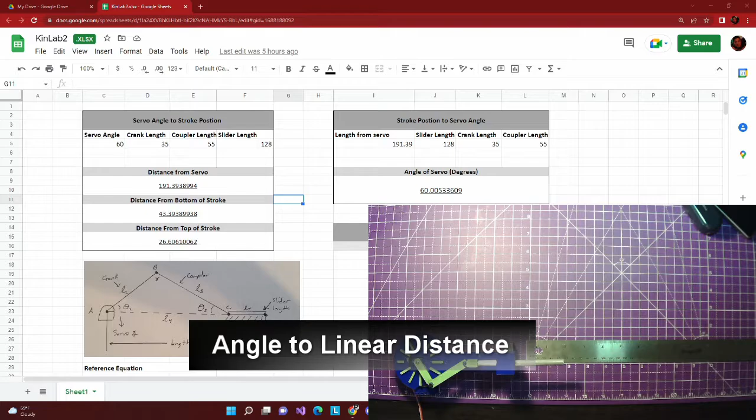Hi, this is Austin. This is lab number 2 for kinematics, rotary to linear calculations. We're going to calculate from servo angle to stroke linear length, and in reverse, from stroke linear length to angle.

So we've got our spreadsheet over here. We should just be able to enter the angle and it will calculate the distance from the servo, which is L4, this little dotted line, and the distance from the bottom of the stroke. It's kind of hard to see on this one.

Let's pull this up. So distance to the bottom of the stroke is from this little black mark over here when it's in the retracted state, and distance from top of stroke is from the retracted state end, this little dash line, to the extended end of the rod over here, this black arrow.

First things first, we'll go briefly over the calculations. This is the reference equations we use, and we input these equations into Google Sheets, and that's how we're able to pop out these values over here.

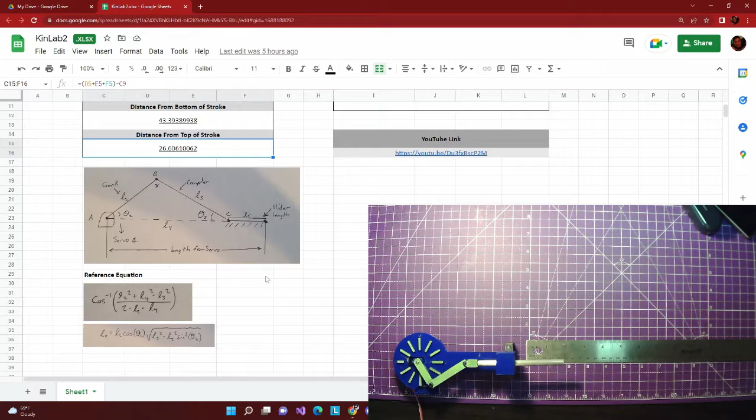And there's L4 right there. Okay, so a weird thing with this setup is that there's a little offset distance, this orange box over here, and at the end of the orange box is our technical zero point. So the offset distance is from the blue end of the blue part, as you can see in the picture, to the end of the rod when the rod is at 180 degrees. That distance is this orange block, which is 16.50.

So we'll reset it right now to 180 degrees so you can see the offset distance.

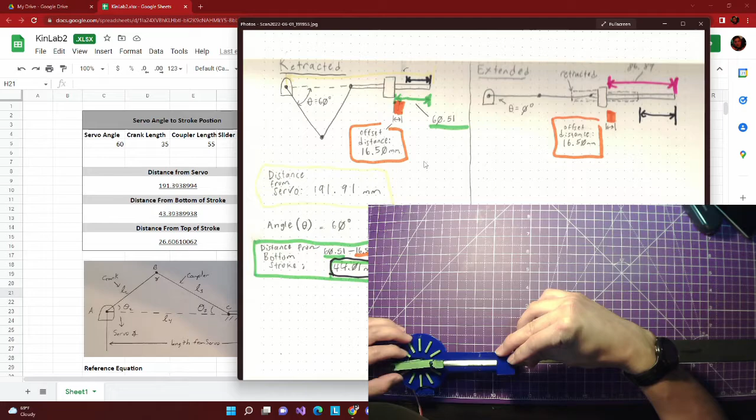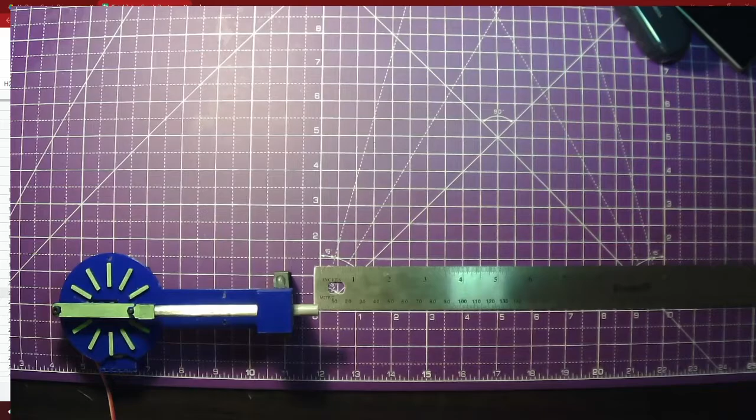It's a little hard to see, let me increase the resolution here. So as you can see, this is at the 180 degree position, and the end of the rod is at this zero mark over here. Be careful though, these grid squares aren't a centimeter, they're actually around 12 millimeters. Two of these will equal 1 inch, down here you can see 12 to 13, that's an inch.

But we're just using this zero point as a reference mark.

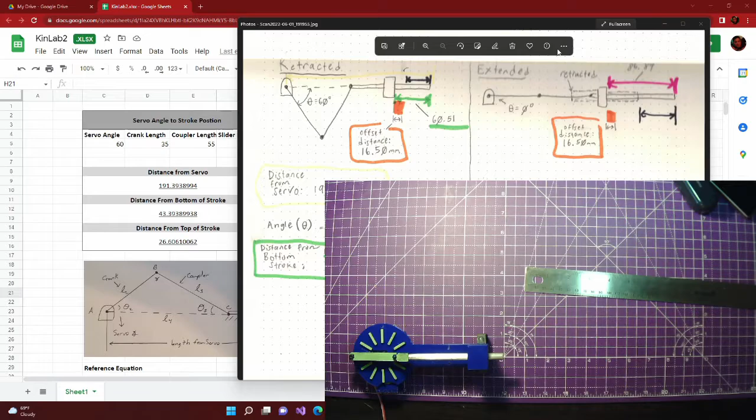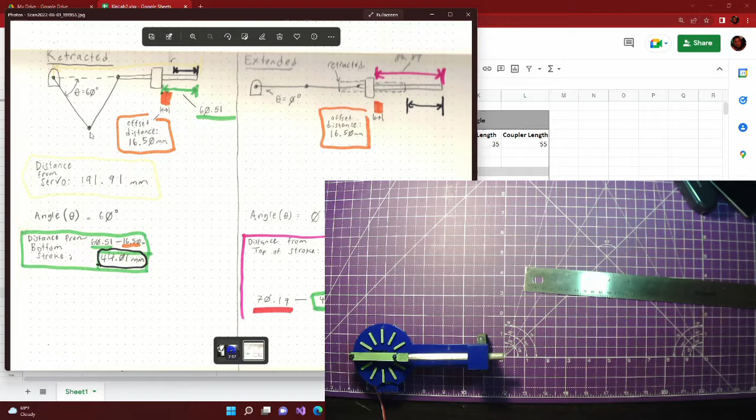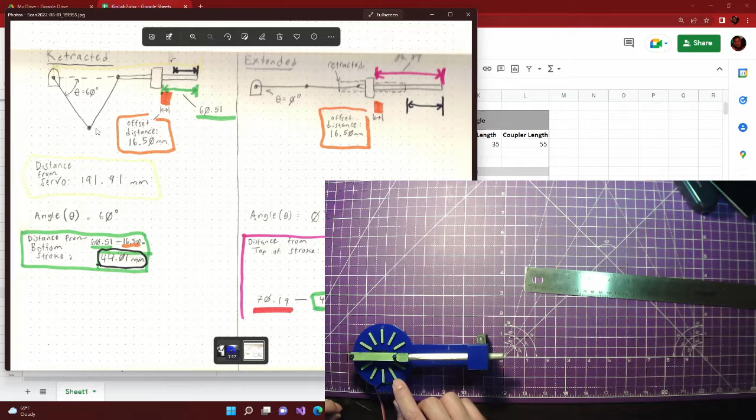All right, now that we've shown you the offset distance, we'll put it to 60 degrees and input it in our spreadsheet to see if our calculations match real life measurements. We're going to move it to this line right here, this is 60 degrees.

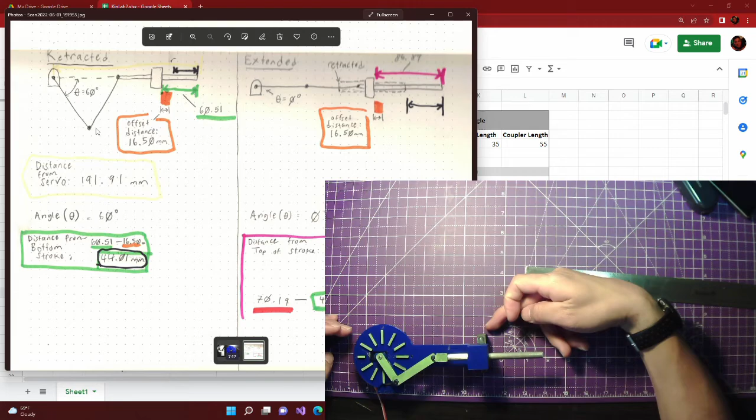And then we're going to measure. All right, roughly there, let's make sure it's aligned again. I have a little black Sharpie mark over here for alignment. All right, so it's at 60 degrees.

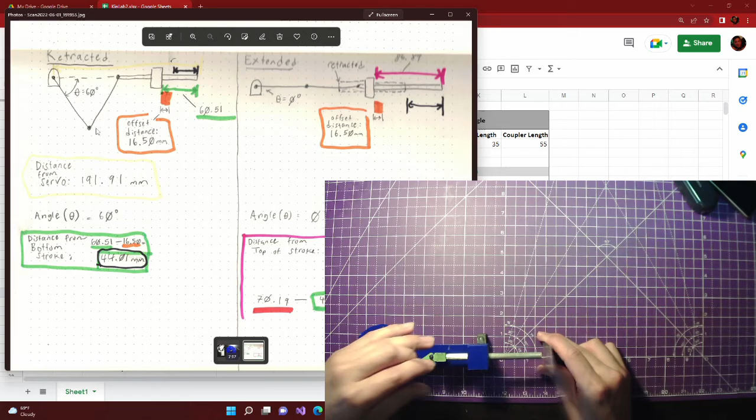Now we're going to measure from, let me get a pointer, we're going to measure from the zero here to the end of the rod. The end of the rod is roughly right about there. Let's put a little Sharpie mark there, sorry for cussing.

All right, so we're going to measure from zero to this Sharpie mark, and then we'll compare it with our calculations. Yeah, pretty spot on, about 44, 45-ish millimeters.

All right, so at 60 degrees, as you can see, we earlier measured the whole thing plus the offset distance, so we subtracted it, and it comes out to roughly 44.01 millimeters. This yellow box over here, distance from the servo, we can double check that as well.

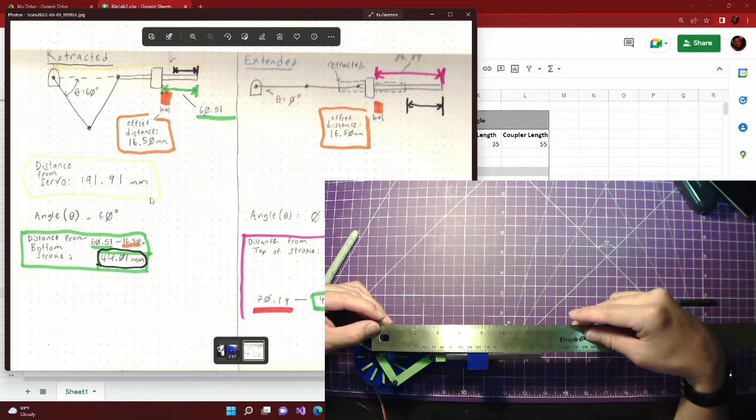I'd say it's pretty close, maybe 194, 193, somewhere around there. I think our eyeballing calculations were off before.

So as you can see, in the retracted position, our measurements match up. Let's input it into the spreadsheet here. So we've got 60 degrees over here, distance from servo 191, plus or minus a couple millimeters.

Distance from bottom of stroke should be about 44. Yeah, we measured that earlier actually, we're close to 45-ish.

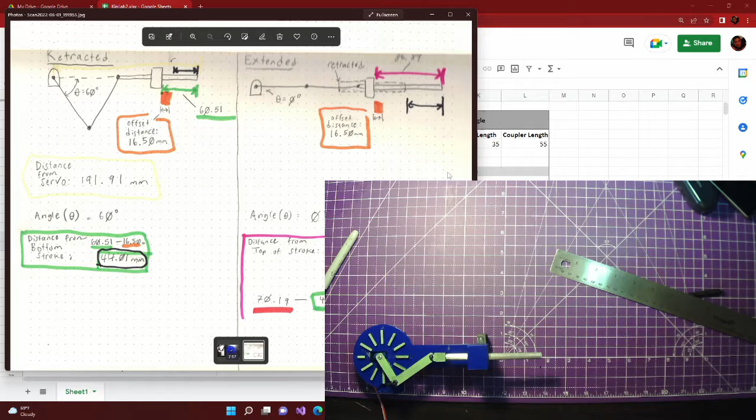And now we need this distance from the top of the stroke in real life. So we're going to pull it, hang on, let me shrink this, to the extended position with the arm fully extended, and then we'll get this black distance over here. Okay, let's do that.

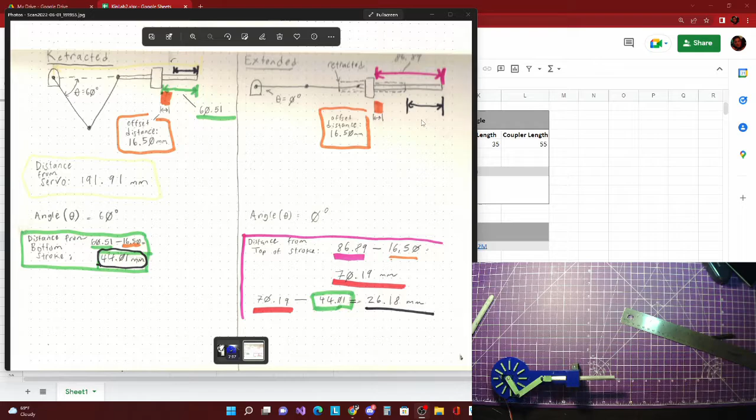All right, let's extend it all the way to this mark right here, 0 degrees. There we go.

And just to double check this purple value, which is from the edge of the blue frame to the end of the rod when it's extended, it should come out pretty close. I'm about 80, maybe 87, 86-ish, plus or minus a millimeter or two. So that matches our calculations.

And then we'll get the current position in extended, wherever the rod ended at, roughly right about there. So this is, we'll put E for extended, R for retracted.

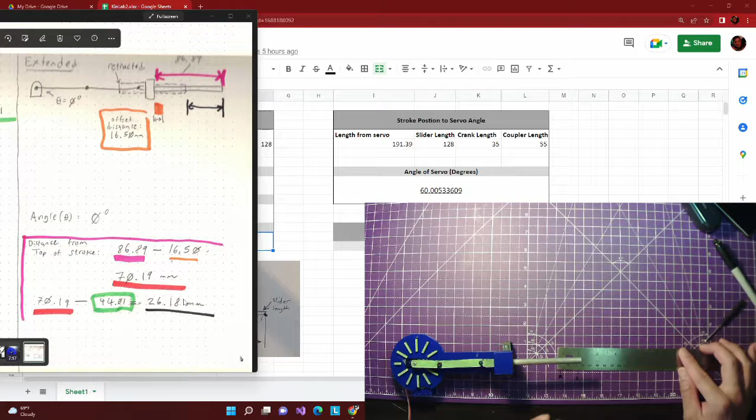So going back to our spreadsheet, distance from top of stroke, it's pretty darn close, 26, 26. All right, let's see, next we'll go with distance to angle.

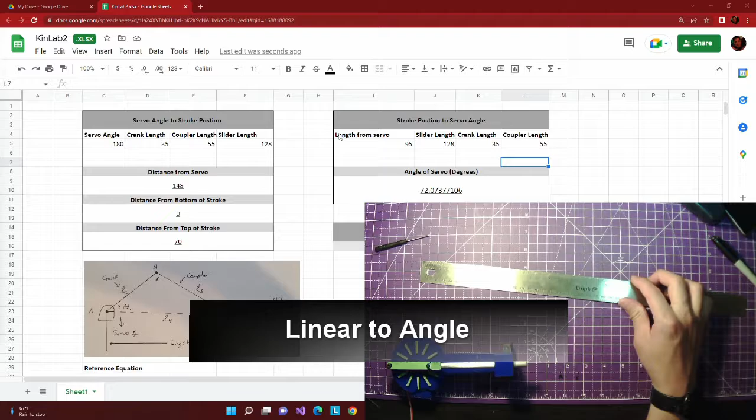Next we're going to do length from servo to servo angle. So right now the servo angle should be at 180 degrees over here, and then we're going to measure the length from servo to the end of the rod.

All right, so we're sitting at about 148-ish millimeters. We're going to enter that into length of servo, and it pops out with 180 degrees.

Okay, and then let's jog it down to this mark over here, so each tick should be 30. 180 minus 60 is 120 degrees. So that's our calculation, and we'll input it in here.

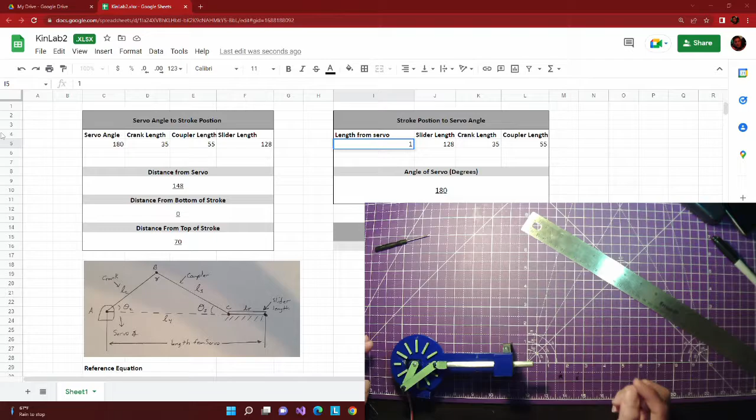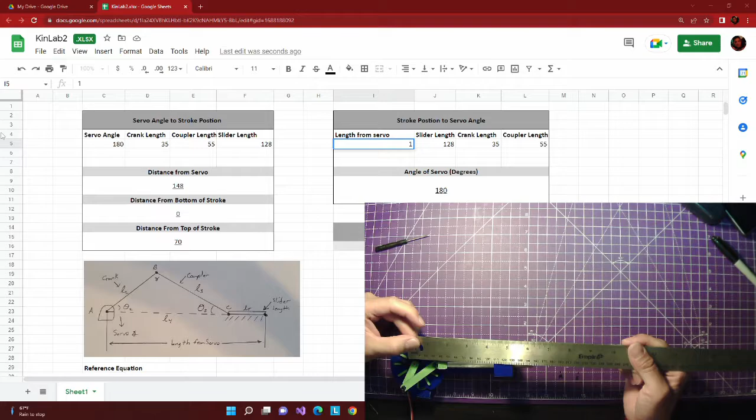All right, so now we should be at 240 degrees, let's measure. We're sitting about 160, 159-ish, okay, so 159.

And we are popping out with 112. That doesn't seem right, probably because of the quadrant. Oh, I think it might be taking from this 0 point over here.

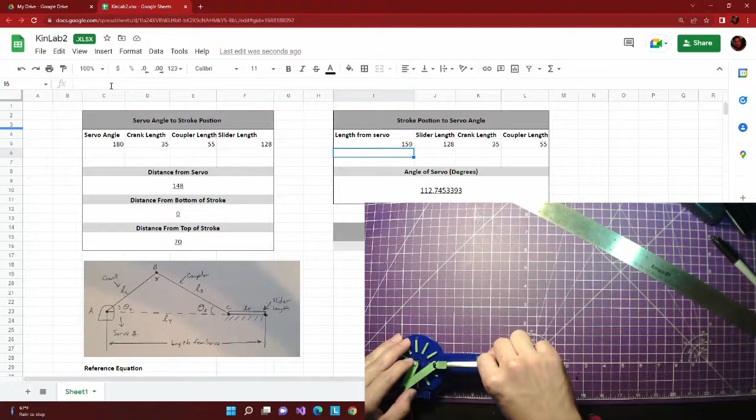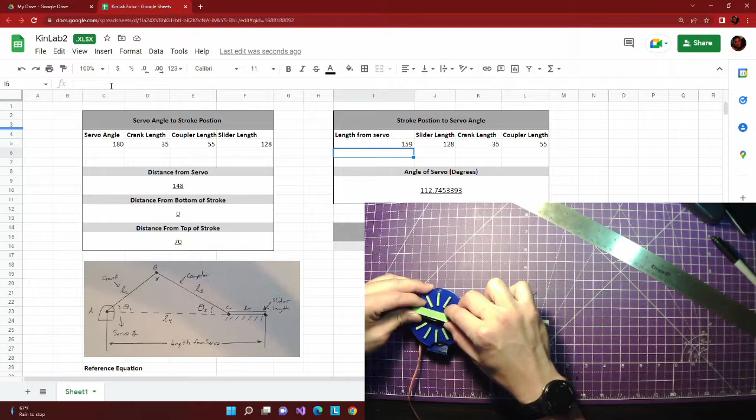Here, let me move this up. I think it's taking from this zero point over here, and it's going 3, 6, 7, 9, 10, 11, 12, it's going this way. That's why it's popping out 112 degrees. So that is definitely a fault.

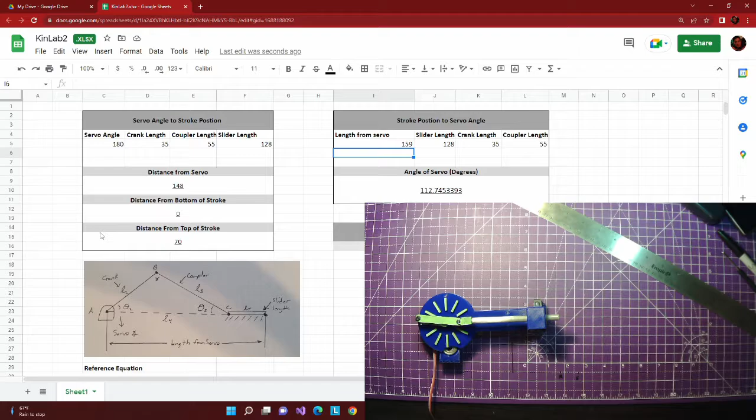We could probably fix that with some trig functions, might have to look into that in the future. But yeah, we'll stop here for now, and I'll call it good.